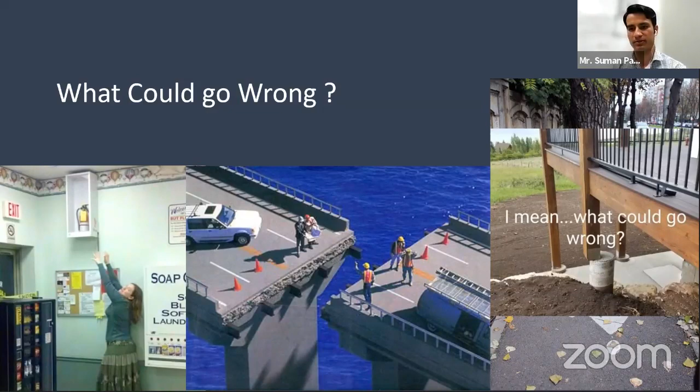So, a simple example like the fire extinguisher there. And you can see the bridges that they started to build from opposite sides, and the bridge doesn't meet. Of course, we don't want that to happen. And you can see smaller things like that on the bottom right, where the column is not in the center, and it's supposed to be in the center. Yes, it's a small thing, but if you look from the stresses and structural perspective, it's not going to transfer the loads it is supposed to transfer.

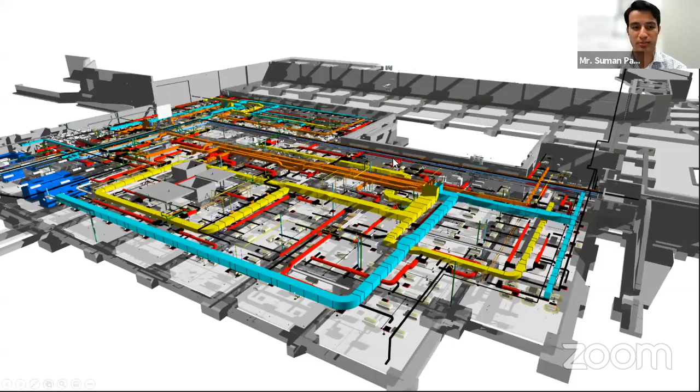Fire protection, supply duct, return duct, exhaust duct in different colors, lighting, and you can see all those services that need to be in a building to run a building. We model all of that and coordinate. So, to get a little bit deeper here, you can see the structures, mechanical services, foundation, all of these, we put together and create a federated model, also called a consolidated model.

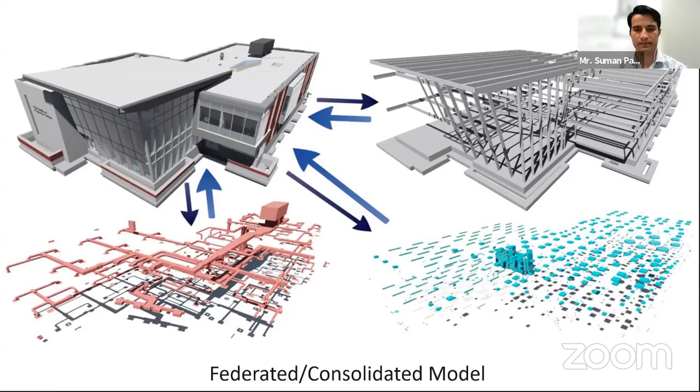Another could be a soft clash, which means, let's say you wanted to open the door, but you can't open the door fully. And that is also essential. If you think about panels, electrical panels, control panels, fire protection panels, you won't be able to do that. So soft clashes are also important.

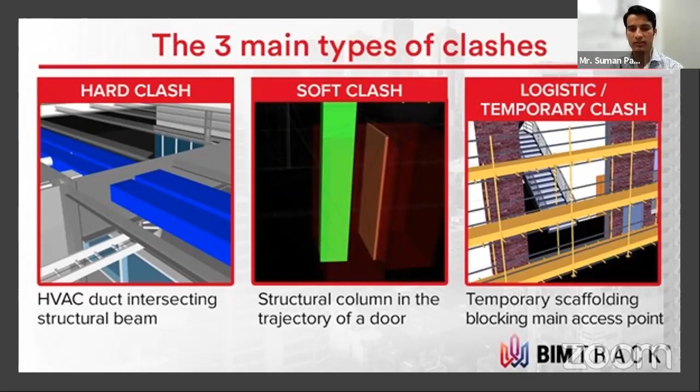I know I'm going quick just because of the time, but I wanted to share that VDC is not just used in the construction phase, but can be used in various phases of the project lifecycle. Looking from the design side, it can be used for engineering analysis, and documentation to document existing conditions. And of course, it is a great visual tool so that design engineers, owners, everybody can share their ideas and make a better product.

So when we jump into the pre-construction phase, where estimating, bidding, scheduling, logistic planning, and constructability analysis happen, having that 3D model with the data helps a lot.

And I also touched on a coordination aspect already on the construction, where we can do the trade coordination. So mechanical trades are not going to work on electrical. Electrical trades are not going to work on the building control management. So we want to make sure that each trade has their scope coordinated. And from that coordinated model, they would be able to generate shop drawings or fab drawings, which are more or less detailed drawings with each and every information, because design drawings won't have that detailed dimensional information. They will just be design intent.

It can also be used for model-based layout using the total station. So each point on the ceiling will be shot to make sure that it's in the right location. Of course, it will be a great tool to do the QC. And ultimately, design is done for a year or two. Construction is done probably for 3 to 4 years, but the building is going to be used for many years, 30 to 40 years. So the closeout document is very important, and we take that very seriously in our company to make sure that owners will get the accurate as-built information for their facility management purposes, where they will have all the asset and warranty information required. And of course, we can use it for many more.

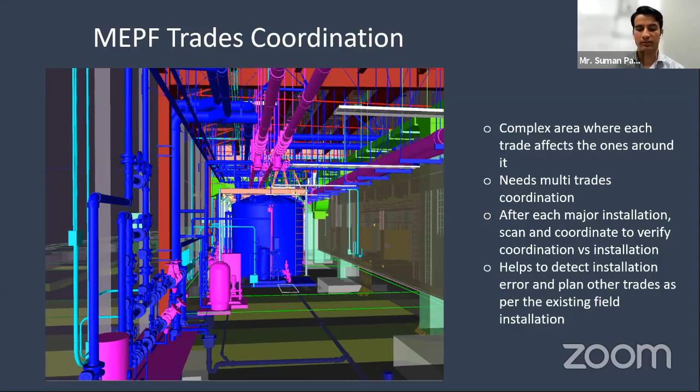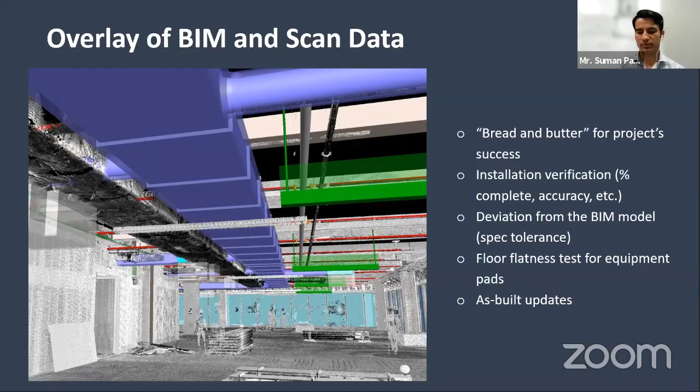Usually these kinds of facilities are very spec stringent, and we want to make sure that we're not missing anything. Floor flatness, a test for the equipment pad. Some of the equipment could be very susceptible to the flatness. So we need to make sure that they are absolutely flat, and we need to verify that. And doing the laser scanning will help us. We can do the flatness test, and of course it can be used for as-built purposes.

And so if someone were to go and dig here, they have to have a dig permit from us to verify that no utility will be in the ground, or they have a plan in place if they were to dig. And from drone footage, we'll also be able to see the high level overview of week to week progress, how the work is progressing. Are we on schedule? Are we making good progress?

Even if the data that we get from the drone is not as precise as from the laser scanner, it is still, I think, very beneficial for us.

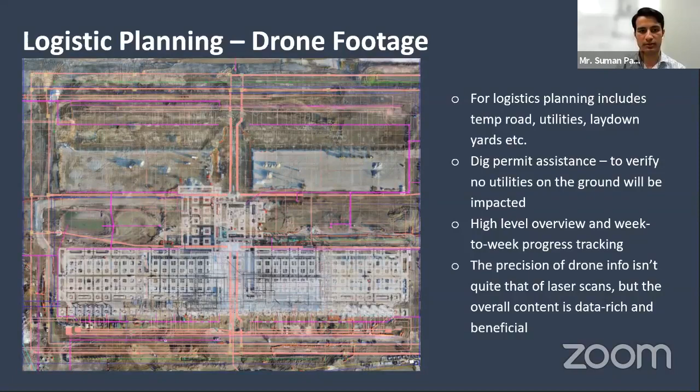And the last use is scan for renovation, which means the existing facility, where we want to capture the existing situation. And this is going to be a good tool because just by measuring with the tape or a total station, we're not going to be able to get all the details, color, texture, size, and so on and so forth. But just by doing one scan, we'll be able to capture the existing condition. And we can import this scan into Revit and get the plan, section, elevation quickly.

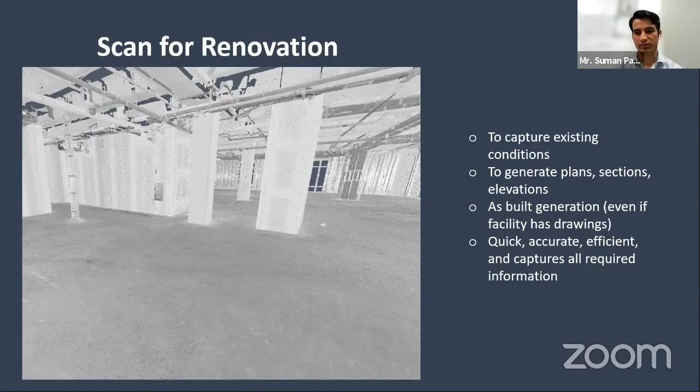And even if we have as-built information of the facility, we still prefer to do the scanning just to make sure there is no missing info. It is going to be quick, accurate, efficient, and captures all the required information for us.

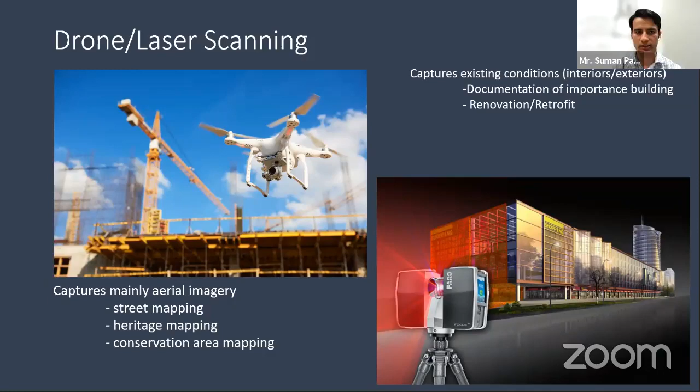Virtual reality, augmented reality, mixed reality, some of these terms are also being very widely used. In our job site, we use all of these technologies, and you can see on the right, virtual reality is where you are in full immersion, and it will help to do the design coordination and auditing, making sure all the systems are there and function the way they are supposed to, structure, architecture, mechanical, electrical, and everything.

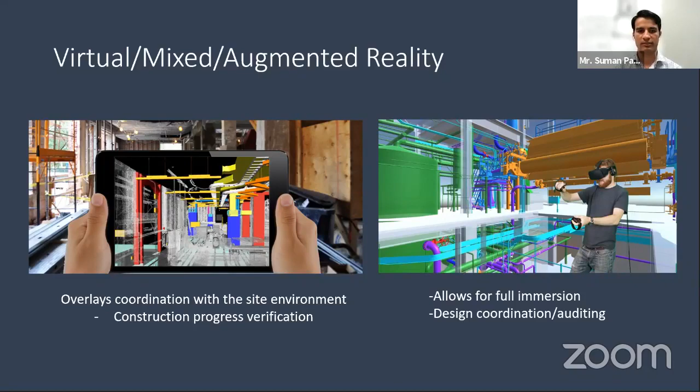And on the left, you can see a real construction job site where you walk with the iPad and overlay the site information with the coordinated model, which will give you the progress on the job site, how we are doing, and whether the installation is accurate. And all of this will help to do the quality control of the project.

So that said, what are the benefits? The benefit is, of course, improved communication. In a big job, communication is the key, and construction is all about communication, from top to bottom, from owner to trade, and from the companies to individuals. So it's very important that we have good communication in place and everyone is on the same page.

It also helps to visualize the scopes between the trades. There is not going to be any confusion about who is going to install what, because we already know what their scope is, and those scopes will be modeled by the trade. So it's going to be a quick scope visualization tool. Quantity takeoff, of course, we can take off the quantities quite easily. This will also help to reduce change orders.

So change orders are documents that occur after the drawing is issued as a contract document. After contract documents are issued, they need to track if anything changes because of the site condition, because of the owner's changes, or because they had to change it because of some issues. At that point, it becomes a change order.

And of course, we want to reduce change orders as much as possible, because one change order could take anywhere between 7 days to 2 weeks. So we want to make sure we don't have that latency or the wait time. And another important key thing is the fabrication.